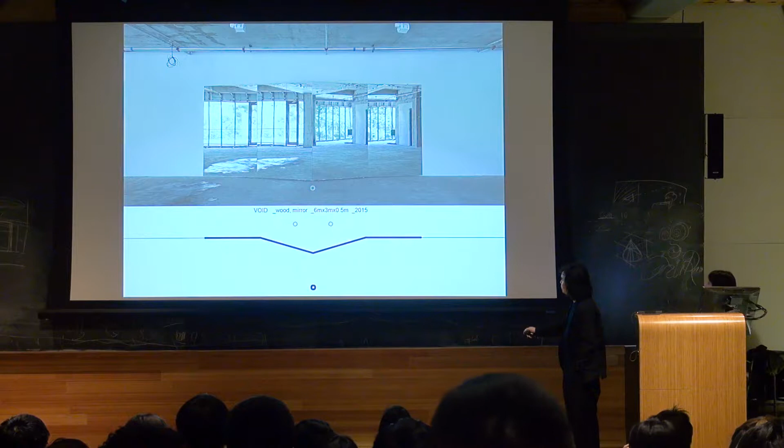Do you feel a little bit strange when you see this photo? Because in order to take this photo, you have to stand right in front of the mirror, facing the mirror, but you don't see yourself in the mirror. It's actually by slightly folding the mirror, your reflection image about this mirror will be here, and about this mirror will be here. So you will not be visible at the position you stand.

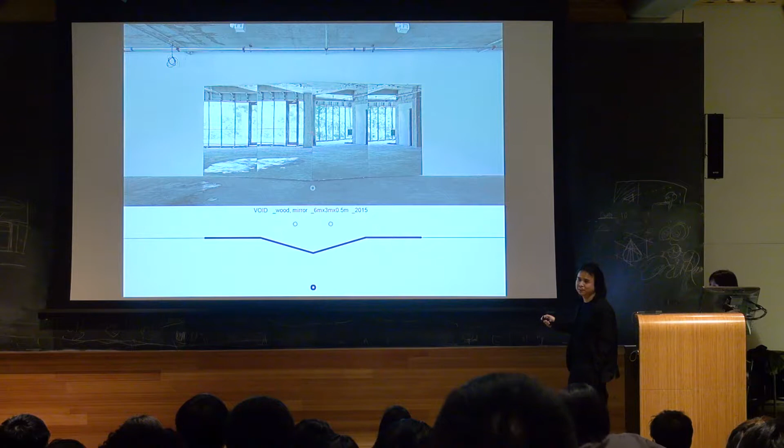So then people get confused because it doesn't have the appearance of parametric design. As you can see from these 2 projects, our work is not really focused on the appearance of the design, but really the logic behind it.

During our thesis design project at the Berlage Institute in 2007, we found designing a system is far more fascinating for us than designing a building. It is more dynamic than what we used to have. We were very excited to see that one system could generate countless variations.

From 2007, we started to do research on systems. We need to do research on systems which have not only a form generator, but are also flexible enough to accommodate different site conditions, different user groups, different programs, etc.

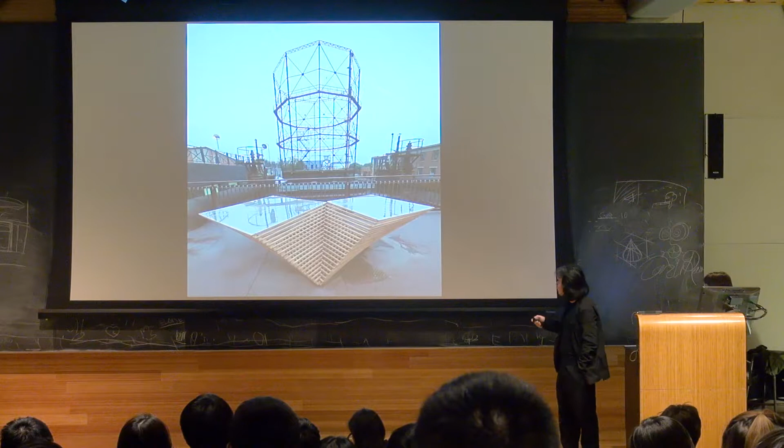In our office, we were always trying to operate in a relatively low, low-tech construction situation in China, but we always keep the high-technology design process. So this is one of the examples.

If you look at this image, by lifting this square up, you actually create a three-dimensional structure with these V columns and with the roof.

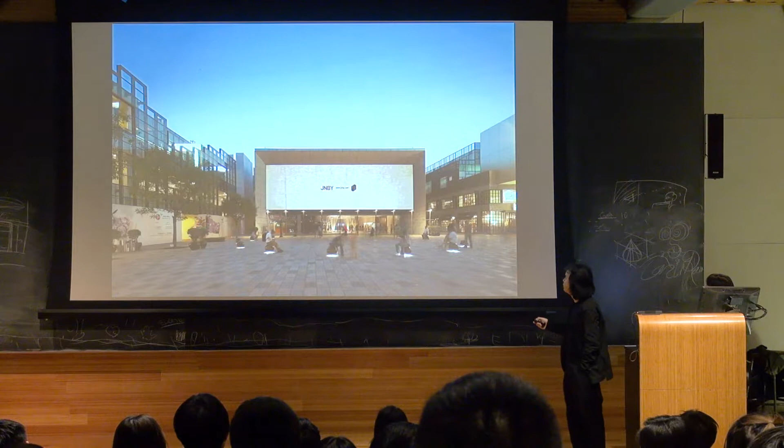By using this principle, we designed a temporary pavilion for a Chinese brand called JNBY in this big hall in Beijing. This is the installation, this is the pavilion they used. So the squares on the ground connect to each other, generating the squares on the top. These structures, these V columns, are the lines from the series, so by adding no extra element beyond the mathematical theorem. And this HP surface actually makes this structure more stable.

And that's the process of how this one was generated, step by step. Lift it up, and put them together, and you'll see the squares on the ground generate the squares on top. The whole installation took 18 hours from scratch to complete, because one night of rental cost 80,000 RMB.

It was too expensive, so it had to be very fast and look nice. Because of the flexibility of this system, it's very easy to manipulate the whole system, which allowed us to actually design this whole space. But that was a geometrical system, and then we applied it on site to accommodate all the functionalities. For example, we have a main stage, so we have a big square here.

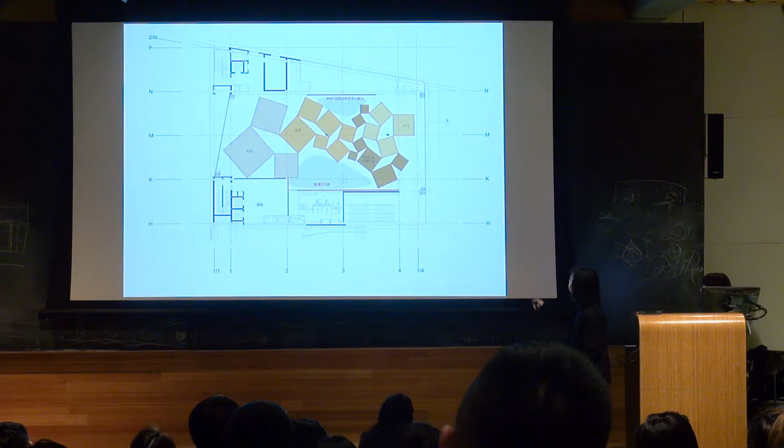We have a runway here, so we have a longer column-free space. And then we have a place for exhibition. We have an entrance that should be perpendicular to the glass, something like that. So this is the exhibition space, that's the runway, and that's the stage. The fashion show was happening, and that's the whole thing.

Okay, biarcs. A biarc is a curve composed of two circular arcs such that they connect with a matching tangent. It has a lot of application in the game industry, such as producing a sword trace or road generation. But in the architecture field, it has been used to simplify complex curves. It's called biarc fitting.

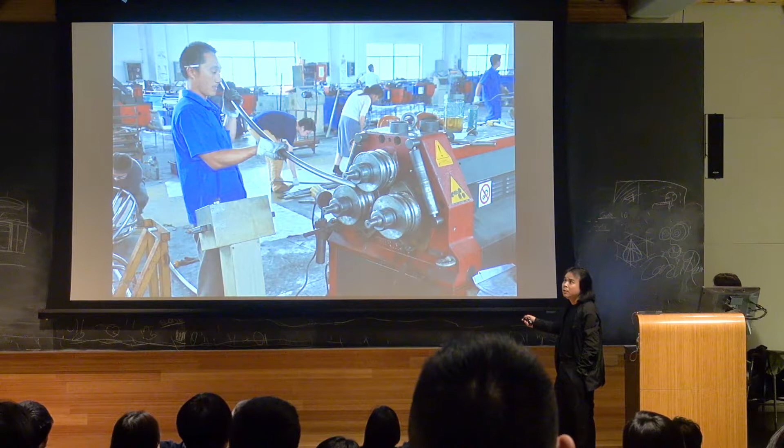And again, this is the machine, just a little bit bigger, the 3-axis machine. 6 years after the first one, same machine, same technique. It's always happening, shit happening, you know. So this is the machine we actually, together with the worker, produced the installation.

That's all flat band metal tubes. We transport them, easy to transport back to the studio, and we just assemble them together to make this bench. These are the students. That's 2 elements, heavy metal stuff, 4 of them putting it together. We did all of this within 9 days, including the design, fabrication, and everything. The students were quite happy.

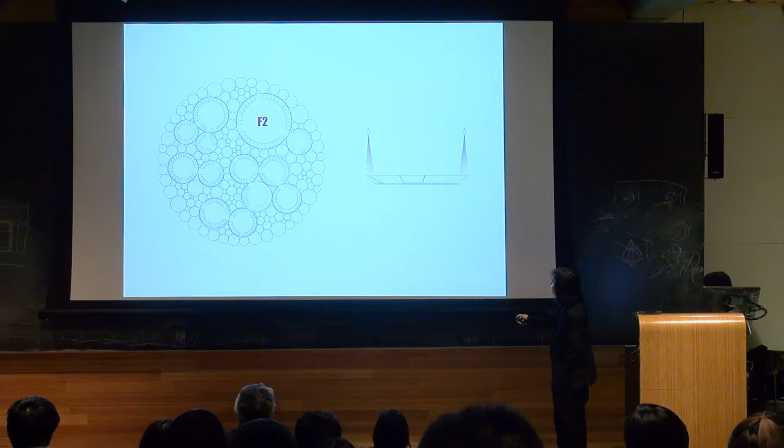So for the lighting, for all exhibition lighting situations, people always like to stay in the dark space and look at the brighter exhibition board, right? So that's why we designed the lighting like that. We designed it just along the circle, to just light up the exhibition board, but no lighting in the middle of the circle. So these lights make the board light.

And the circulation space needs some light because people need to be lighter. And also the installation needs some light. So you see all the small circles were lifted up with this lighting system, and all the big ones are just displayed. Yeah. That's the art performance in a very big circle during the opening ceremony.

And the reason why we do this inclined board arrangement is that we want to give people freedom to choose if they want to look at the whole 3,000 square meter space just by looking this way, or they want to look down for the exhibition content. That's the big space, the whole space. That's the ceiling. Okay.

So, a recursive process. Okay, I'm gonna read it, but it's actually from Wikipedia. I don't know, it doesn't really matter how well it's explained. A recursive process is one in which objects are defined in terms of other objects of the same type. Using some sort of a recurrence relation, the entire class of objects can be built up from a few initial values and a small number of rules.

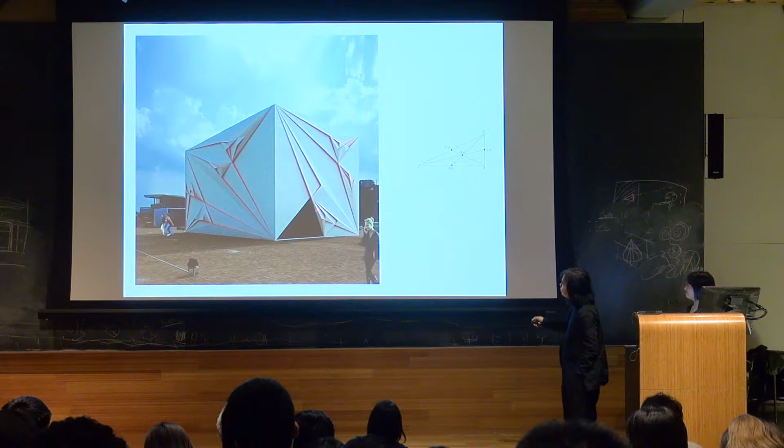But the recursive process basically is just repeating itself again and again. So it produces triangles in different scales, and one of them becomes the entrance of the installation.

Okay. This is a shop. It's a shop located in Shanghai, in the Xintiandi area. If you go there, you can find the shop. This is the product sold in the shop. It's a food product. It's very small, like this. Because they have only this product to sell, the shop needs a very, very strong identity for

the product. Since Shanghai actually has the colonial culture, we thought it might be interesting to combine this. And we found this light. It's a very interesting light. This is a recursive geometry. You see, it's getting smaller and smaller and smaller. It's a recursive geometry, but an Art Deco light. So we thought maybe we can start from this point, and we started to research the fractal recursive hexagon. Okay. That's a door handle.

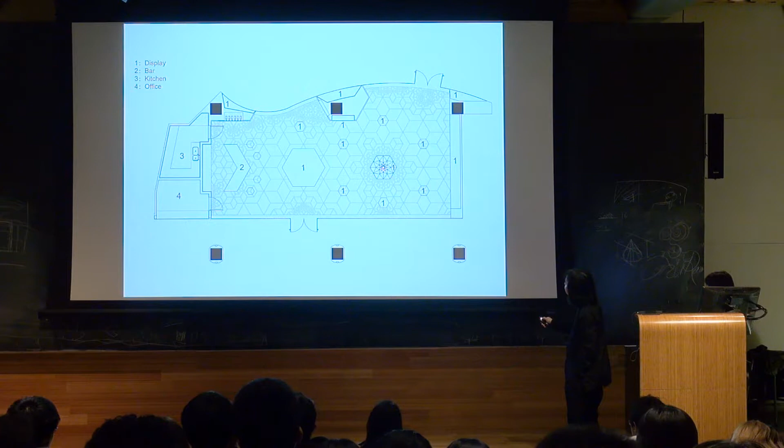So this is the plan of the shop. We basically use the recursive algorithm to generate a fractal pattern. It's a fractal pattern which accommodates all the functions of the shop. For example, this is a big table here. The entrance is here. We have a pattern there, and that's a display table, and also the bar area. Everything together. Yeah, that's the shop.

So you see here, this is a display stand, and that's a big table. The big table is a display table, but sometimes they have some events. They invite people to come to taste their food, so then it becomes an event space, something like that. And if you look at the top, since the product is very small, we designed something very strong, which is recursively getting smaller to attract people's attention.

Yeah, that's from the exterior. That's the bar area, and that's a big display area. One of the interesting aspects of the shop is that it combines cutting-edge technology like 3D printing and 3D milling together with traditional handcraft. This one is handcraft, but 3D printed first. I will explain it later. The bar area is made of brass, hand polished. Also, the floor is handmade.

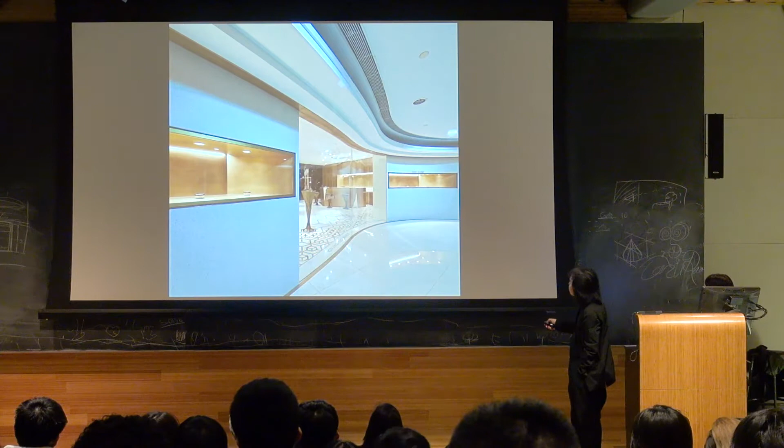Okay, so this is the door handle. In order to make this, we need to 3D print it first, and then we mold it and make a steel one, and cut and make it brass again. So it's the door handle. 3D printing. The ceiling, we use the CNC milling machine and then make the molding. And the brass is hand polished.

This is the pattern on the floor. It's handwork to make all these small joints. This is 5 millimeters thick. And molding. And this display table, first we 3D print the shape and then hammer every piece of them by hand, then weld them together and polish it. So basically we used all the techniques, including the cutting-edge things and also hand making, the traditional way.

Tensegrity. Okay. Tensegrity is very interesting. Actually, it's a structural principle. Tensegrity is a system where you have tension elements and compression elements, but no bending inside the system. The reason we put it in the recursive algorithm is that after the research, we found that by recursively replacing one of the tension elements, for example here, by a group of tension and compression elements, you will generate a more complex tensegrity form.

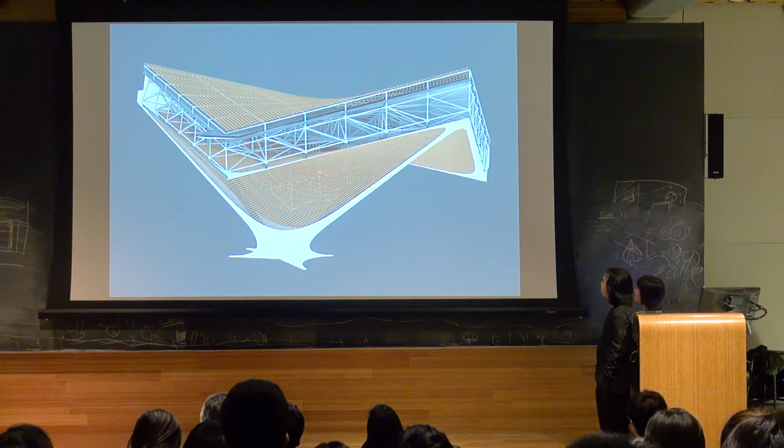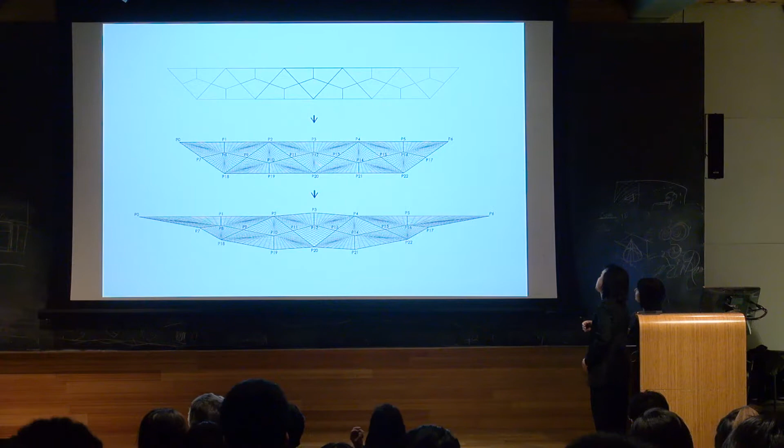And you can see like this. Because of its all straight line features and their easily calculated intersections, all the structure and substructure, everything in the ceiling, can be very easily located. So if we manipulate it in different ways, we get all different kinds of variations. 5 components together. So this is the rendering we have.

And this is a structure drawing with all the V columns. Because if you look at this, this is one prototype, the 3 elements together. And this point is this point. It's a supporting point. And the V column is actually the edge of the HP surface. So by putting these 3 HP surfaces together, you get not only the surface, but actually the structure together.

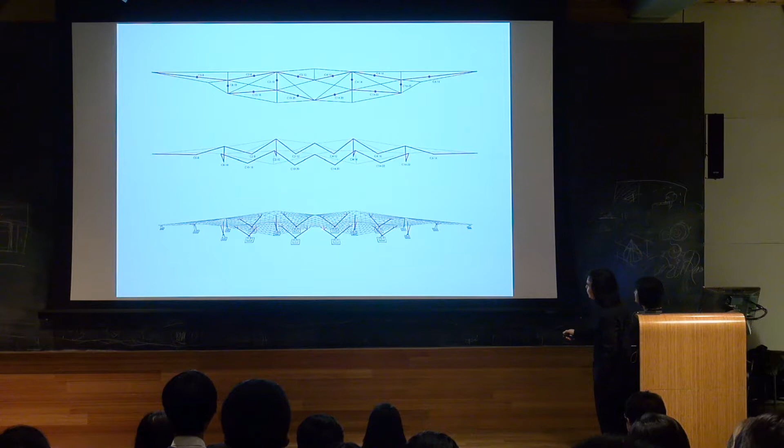So this is a very pure system. But if you look here, structurally, in order to connect them together, you have to split on top. This is a technical issue. Interior rendering, see the straight lines and the V columns. Under construction, V columns and very big column-free space. And these are the space frame structure with the HP surface.

This is a research actually inspired by Frei Otto and Schaur. They did a research on structuring of space and unplanned settlement, and their form finding experiments in self-generated structure. The relationship between the occupation and its connection is the key of this research. So we were inspired by that, and we did also some research on the grid, either the grid system or the N-arm junction model. And it's evaluated by its number of neighbors, its accessibility and its road efficiency, etc. So we had actually a couple of projects based on this research.

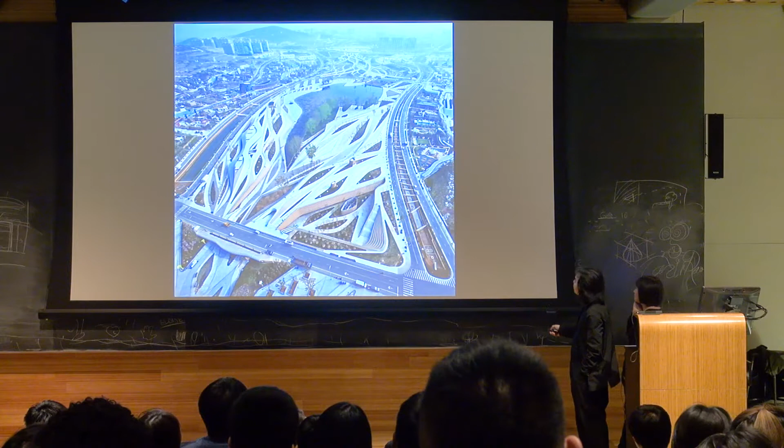And this is not a flat site, so we manipulated the whole diamond grid to make this model. It's a service center located in Qingdao in China, for the 2014 Horticulture Expo. Two years from design to construction complete. This is the whole master plan. The building is located here, and we have another project here, which is another service center. We built two service centers here, and this is the main pavilion of the expo designed by UNStudio.

So that's the site. Nothing special, but some big trees. So we just kept the big trees, and of course we limited the amount of soil which needed to be shifted. Okay, so here comes the diamond grid. The diamond grid basically solves architecture together with the landscape. For each diamond grid, we have three elements. The green one in the middle is basically grass, water, landscape. The light gray one is the circulation. And the dark gray one will be the staircase. So for every diamond grid component, we have these three elements.

And then we apply them everywhere. Then you see the variation here. The green, landscape, and here is water. It was dry when I took photos. And the circulation space here. Then the staircase. The staircase sometimes becomes just a seating area, sometimes just a roof element, and sometimes a real staircase. And it can also be flat; when it's flat, it's just a planar. So basically, by variation, it generates different functions within this field. So it's a continuous field with the same similar principle.

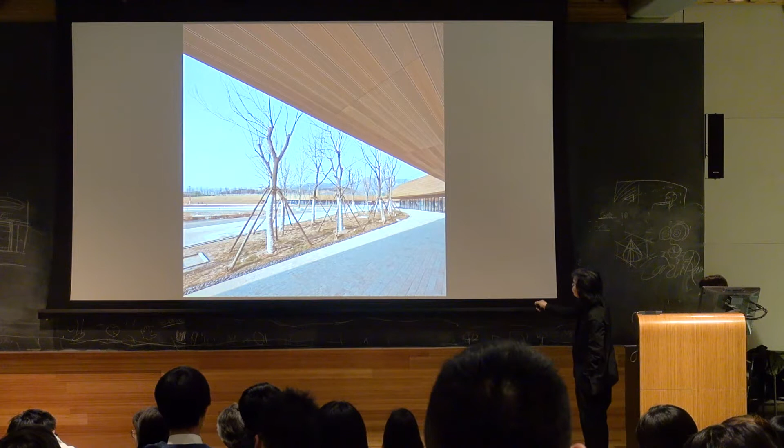Because the building is located in the mountain area, it has to go very well together with nature. So you don't see the building when you stand on top of it, but you see all these big trees which were kept during the design. And this building has a Sunken Plaza, which was here. So now we're standing on the Sunken Plaza. These are the shops and a restaurant for the service center. And these are the trees which were added. And that's the Sunken Plaza on the corner of the street.

And that's the landscape, the staircase, the sitting area connecting the landscape and building.

Yeah. That's the typical weather in China. You know, no clear skies. Yeah, but anyway. Okay, next one.

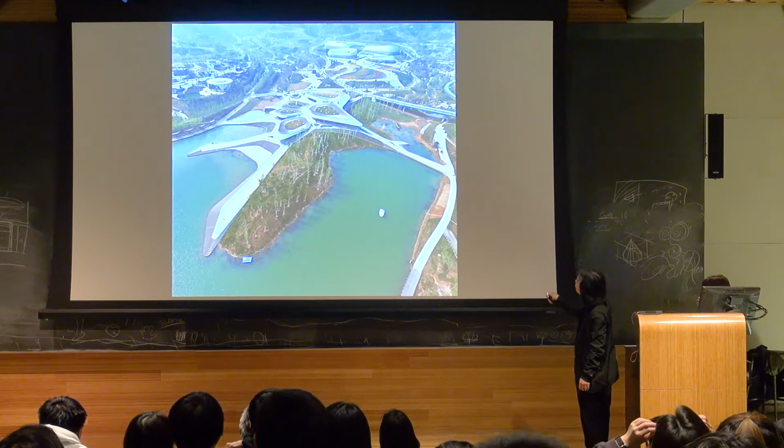This is the second service center I was talking about, the one I was talking about just here, and this one is here, and this is the main pavilion designed by UNStudio. So they were on the main axis of the whole Horticulture Expo. As you can see, this one is also located in the middle of the lake, and we kept all this island. We just added more trees, and we made the building.

It's actually quite an interesting system, I think. It's a 3-arm junction here. But a normal 3-arm junction will have just one center point. But by shifting this center point, we generate a triangle in the middle, which can be controlled by the circle in the triangle. So this is a very flexible system.

You can change the direction of this 3-arm. You can change the dimension of the circle, which generates a grid or a routing system. The interesting point is here: the different dimensions of these different joints will connect to different degrees of activities. We will have this kind of joint. It's only for traffic, because no space is left.

We will have small space, then people can stand there and talk. We will have larger space, then people can meet there. So in the very complex field, you need different dimensions of the joint to accommodate different programs. So basically, we arranged by this system different dimensions and shapes of this joint system.

And also, as a service center, it has to be very easily reached. People have to come here very easily. So this system has to connect with the surrounding road. So this 3-arm junction system is very flexible because it's an open and closed system. The closed system can generate closed routing, which will be the surrounding routing system of the building.

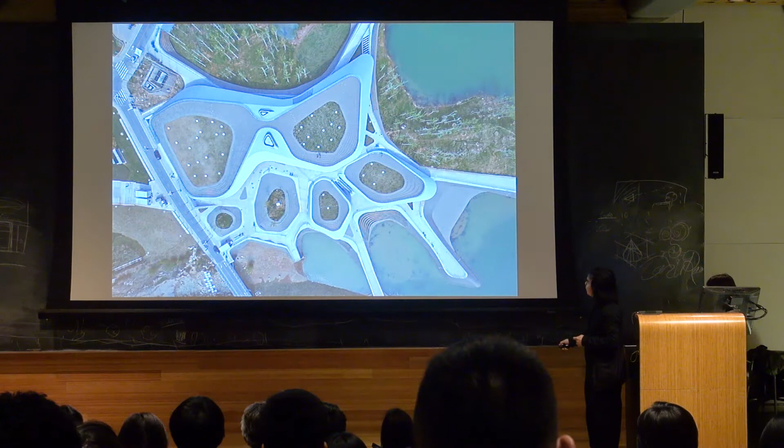Can you read it? Yeah? Yeah. Okay. Closer.

Then we started designing the building according to the program. This is a view analysis. You have the best view here with the water and here with the mountain. Then we positioned the restaurant here on the second floor, and because of the original site situation, we put the other restaurant here on the ground floor, which connects to the water more closely, and we kept all this existing island and put more trees there. And these are the arms which connect to the surroundings.

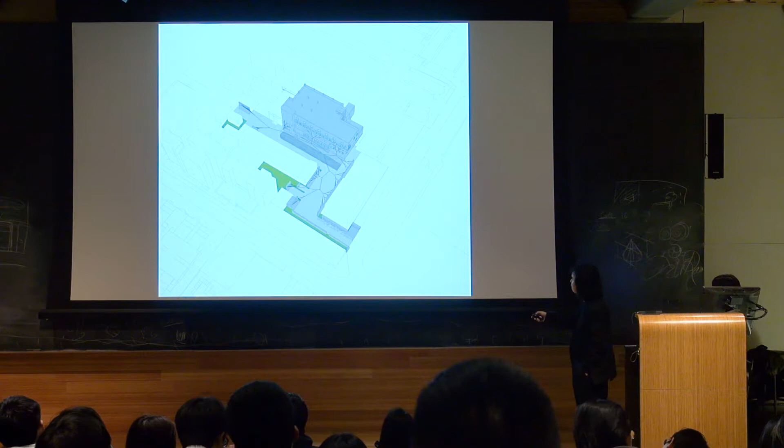And since the surrounding is very complex, we build up 12 walls, concrete walls, and then we connect all the concrete walls together with the building by this system. That's the topological tree of this system. Since the plaza needs lighting as well, this system becomes the lighting system of the plaza.

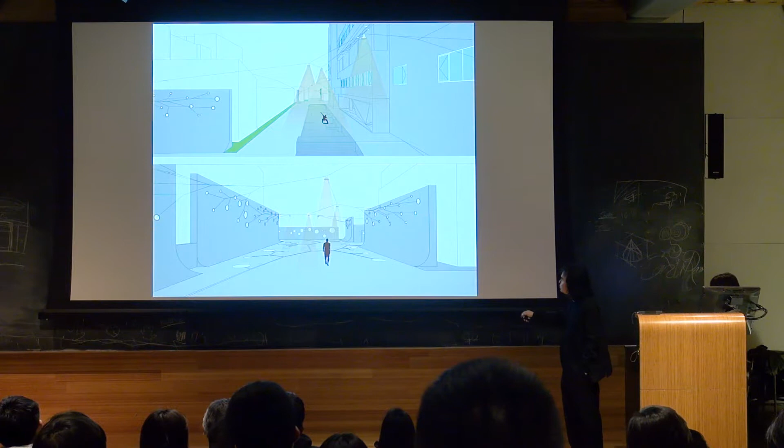Because of the feature of this system, it's calculated in Kangaroo. It's a tension structure. So the positions of the lights are quite even, which generates a very nice lighting situation. You see the light system, and these are the points which connect to the wall from above. That's the skating park. This is the big structure system.

And the joint, again, the joint is very easy to make, because the whole installation took 4 days to install without supervision from the architect on site. I was only calling from Beijing. The project was in South China. But they made no mistake. They made no mistake. It was interesting.

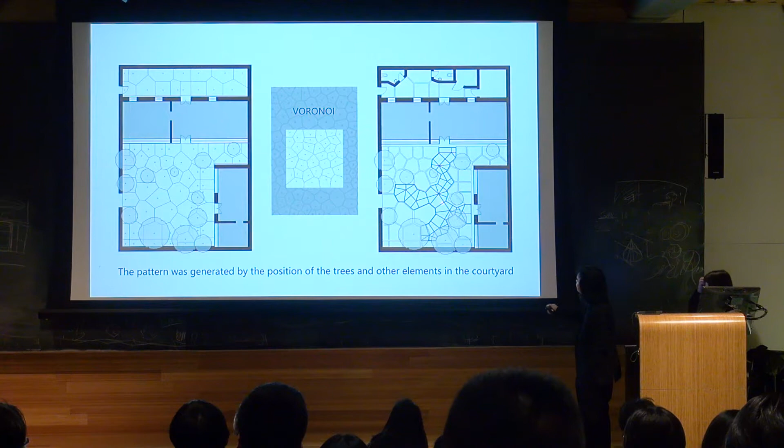One good thing about Voronoi: Voronoi is generated by points, right? So we just put the positions of the trees here, and we add our water collecting system here. Those points together generate the whole courtyard. And the courtyard has the water collection system and at the same time kept all the trees.

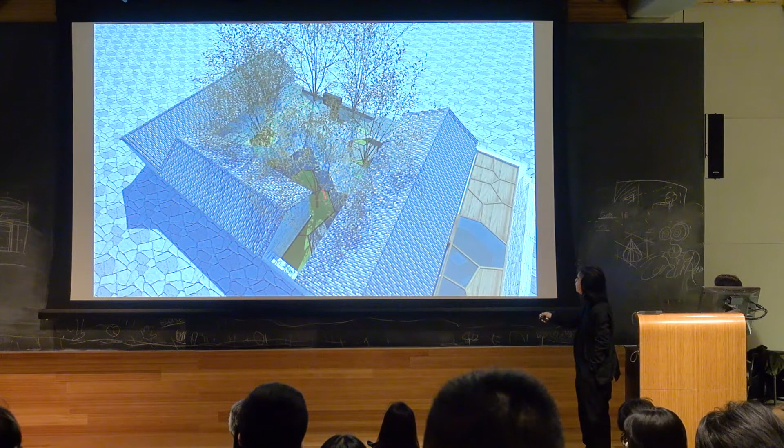It's supposed to be like that. And then you see the drainage here. The water comes down from here, from this downpipe here, and then it goes to the drainage system, and the system will go away to bigger pipes.

The very low technology construction in rural area. But they did it very good because they are familiar with this construction methodology. So that's the completion of everything.

But yeah, one thing is a pity. They don't have enough money right now to formulate the whole water collection system. So right now it's a shading device, but we have already the downpipe and all the drainage done. When they have money, we will just put here something to collect the water. So it can be changed later.

And at the same time, you see all the trees. Not even one tree was cut during the construction period. So it was just kept.

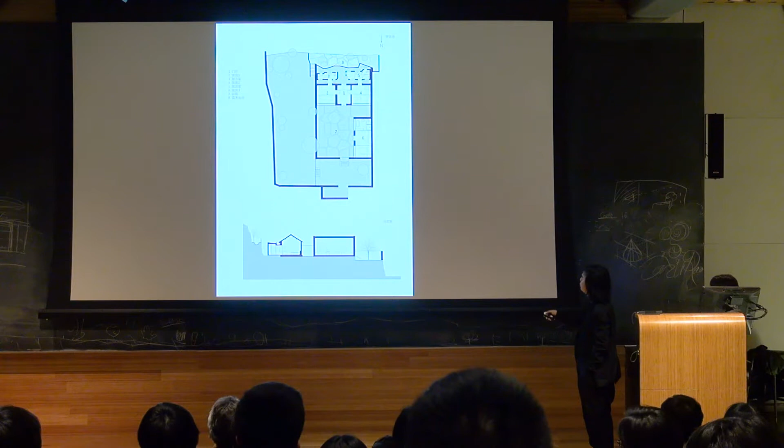On the back side, because those two toilets, those are new toilets we add for the hotel, also generated by the Voronoi algorithm. And on the back side, we have a hot spring, which is here. For the same algorithm, because there were many trees here. So it was generated the same way, 3 pots and many trees.

And this is the plaza. The coffee shop was here. So you see the trees and all this water collection system, and that's the plaza here.

So the plaza needs lighting again. So we use the same principle as we used before, but this time there is a different, because we have only several points surround the plaza where we can connect our tension system. So it changed to a closed system with only several points connection. So this system together with the previous one actually can somehow solve all the similar situations already.

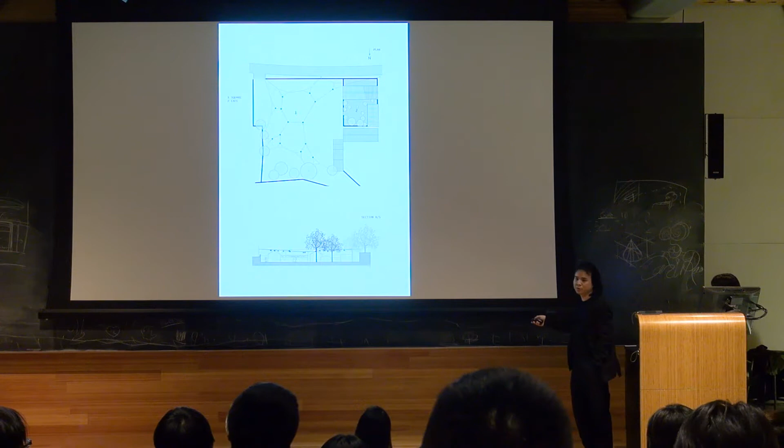Thank you. Any questions?

Thanks for sharing us those excellent cases. And in my past experience, those computer generation may have some mechanical sense. So my question is, can you give a quick introduction about how you balance the mechanical sense of computer generation and the organic form that design requires?

Sorry, the question again? How to balance what? How you balance the mechanical sense of the computer generations and the organic form that the original design requires. Mechanical and organic.